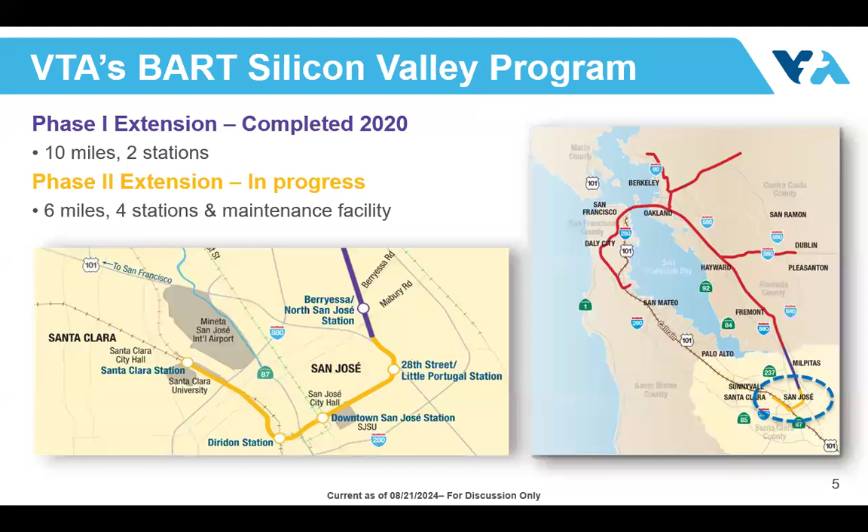I also have some really exciting news to share about where the program's going. We're here because we're trying to complete the ring of rail around the bay that started over 2.5 decades ago, when San Jose and Santa Clara County voters started taxing themselves to support the extension of BART in Silicon Valley. Many of us ride it every day, the extension we call phase 1 of BART Silicon Valley. Those first 10 miles were an important step, but not the final step.

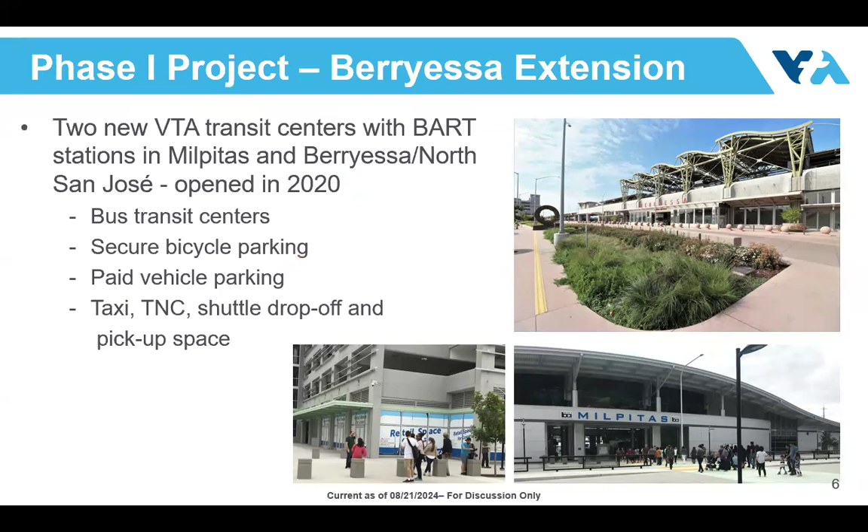Our job now is BART phase 2, which means bringing those tracks from Berryessa through Little Portugal, through downtown, all the way to Santa Clara. When it's complete, we'll have the station here in the Little Portugal community, plus two stations downtown, a modern rail yard in Santa Clara, and of course the Santa Clara station.

This project is one of the biggest public works projects ever undertaken in the South Bay. When it's done, there'll be a train every 7.5 minutes leaving Santa Clara, traveling across San Jose, up into the Bay Area, connecting all the major central business districts, Oakland, San Francisco, San Jose. It'll transform mobility in our community, and I know many of you have had that dream for years. It's our job to get it done.

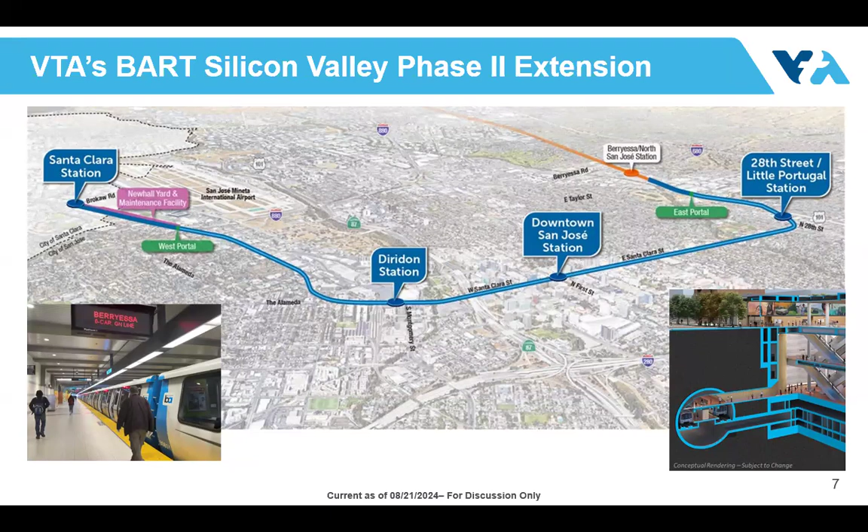Schedule-wise, for those who haven't seen it, we are planning to get BART Silicon Valley phase 2 open in early 2037. That wasn't a very popular message. We're in for over a decade of construction. We're in for the long haul here, and we're good for the long haul.

You'll hear some comments later from my colleague about how we're going to support the community, support small businesses to thrive through construction, so that the construction itself can be a win, in the same way the actual opening will be.

Let's talk about the most exciting news. We broke ground for this project, so we are under construction, building BART Silicon Valley phase 2 right now. On June 14th, community and political leaders - going back, Mayor Gonzales was there, Carl Guardino was there - generations of Silicon Valley leaders came and broke ground at a site in Santa Clara we call the West Portal. That's where we'll eventually sink a large tunnel boring machine into the ground and build a 5-mile-long tunnel from Santa Clara all the way to the East Portal, just past the 101, east of here. We're under construction.

We also found out six weeks later that we're getting the second largest award for any transit capital project in the country from the Federal Transit Administration - $5.1 billion coming to San Jose. That is actually very good.

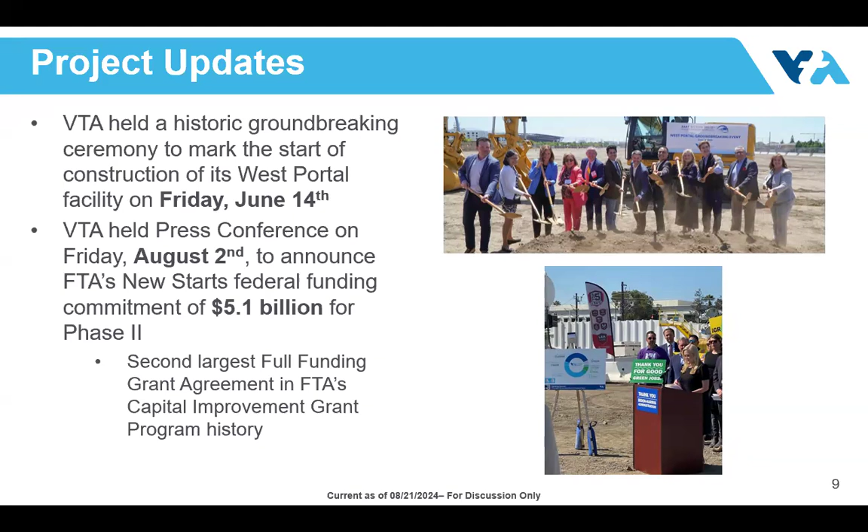At $5.1 billion, it's a lot of money. It's the second biggest ever, the most ever project outside of New York City. Unfortunately, it is not every dollar we need to finish the project. And that's the challenging position that we, the project team, find ourselves in right now.

We are working right now to fill that gap through additional funding sources, but also by finding some efficiencies and cost savings to deliver this project for less than the overall $12.75 billion.

So we find ourselves at a really exciting juncture now, under construction, almost fully funded by the federal government, lots of support, lots of wind at our back in terms of funding and support. But we still need to make some important decisions about the design.

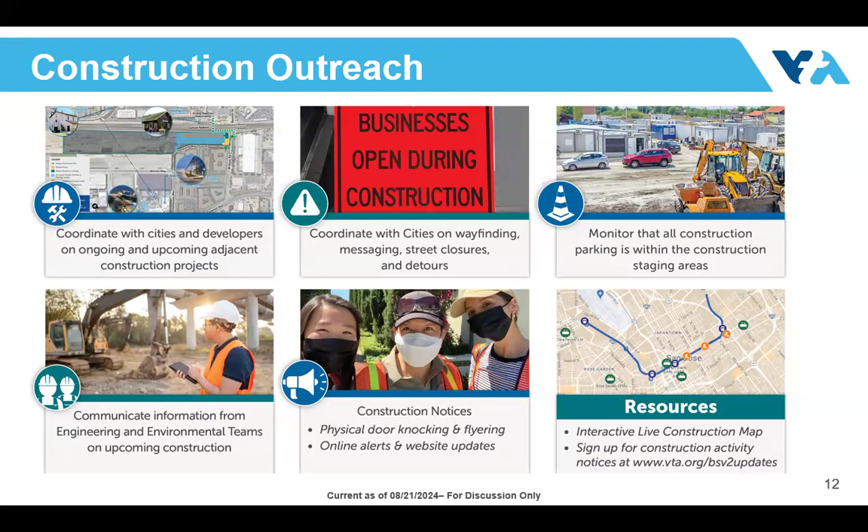As construction really begins, our team will be knocking on doors, doing flyering, engaging with businesses, and engaging with you all to keep you informed. So if you haven't given your email or your phone number, it's a good way to stay up to date on the project. I promise we won't spam you, but we generally send out good information on a quarterly basis.

Specifically for businesses and for those that maybe own businesses in the local community, we're going to be having a program called the Thriving Business Program. This is a program that specifically will be helping small businesses during construction.

For those that are affected or close to the construction, we'll have three things that we'll be doing to really help businesses. We'll have a marketing and signage program where we highlight businesses in the community, highlight you on VTA buses, at bus stops, on signage, city newsletters. The city is a strong partner on this program as well.

We'll also be providing direct resources to the community. So if your business needs marketing support or accounting support, or how to learn how to do something, we'll be offering additional resources to the community. And then third, there will also be a direct financial assistance program.

So those are for businesses in specific areas that will be affected by the most major elements of construction, like sidewalk closure or lane closure, or something that will be directly affecting your business. If you're interested in that, we have interest forms where you can talk to staff members.

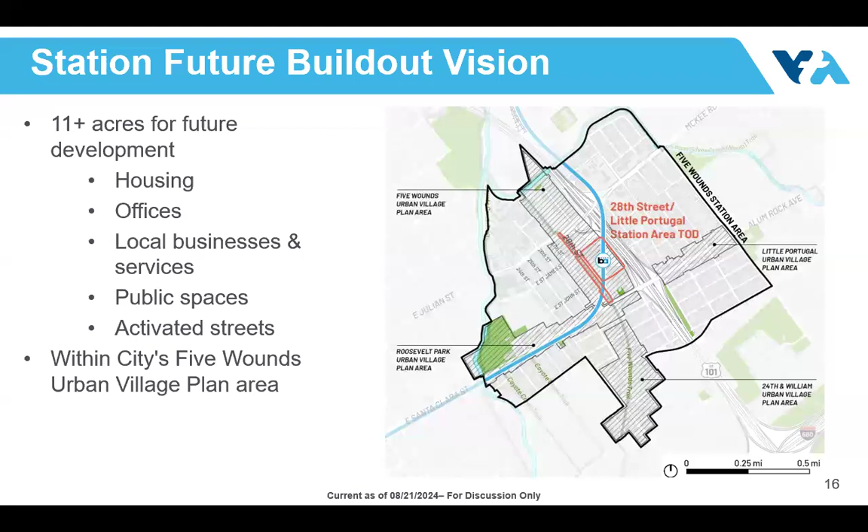Another important effort, zeroing into the station area, is the 11 acres of space directly around the blue station in the center. This is land some of which will be used for the station, but once we're done with construction, also has the potential for additional homes, jobs, community gathering spaces, and parks. Our other team at VTA, led by our transit-oriented communities team, Lissa and Christina here, and our consultant partners, has been engaging with you on what you really want this to look and feel like in the future, and how it will serve you as a community, whether you live here or work here.

Make sure you visit some of those boards here as well, so we have details, and you can ask staff questions about design, or give preferences or things you'd like to see in the future. They're going to be engaging with you a little more in the fall or winter, after we work through some of the details on the station, which is the purpose of why we're here tonight.

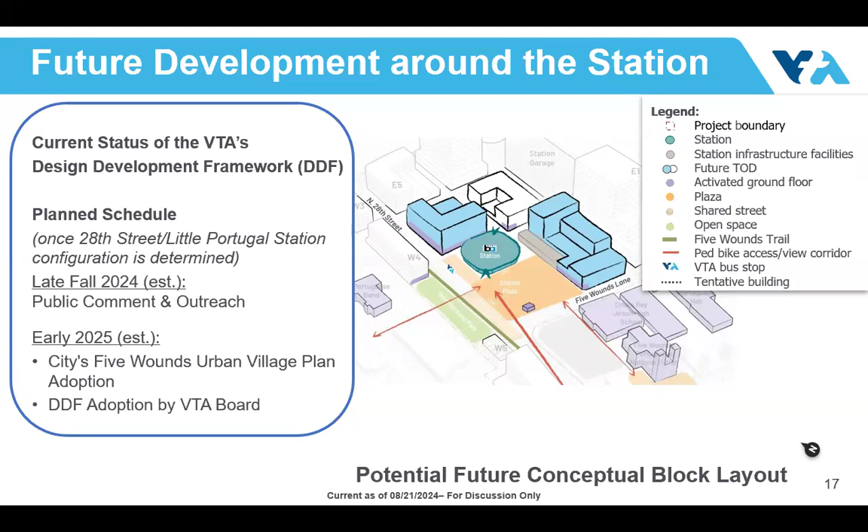Building on some engagement we've done today, we've talked to you a little about our community working group. This is a group of community leaders we engage with on a quarterly basis. We've talked to them twice specifically about some of the content we have here tonight, and they provide us that feedback. We made a commitment to come out to the broader community as well, you all here, and gather additional feedback tonight. So we're building on some of the feedback those leaders in your community have provided, and we're going to go over some of those details now.

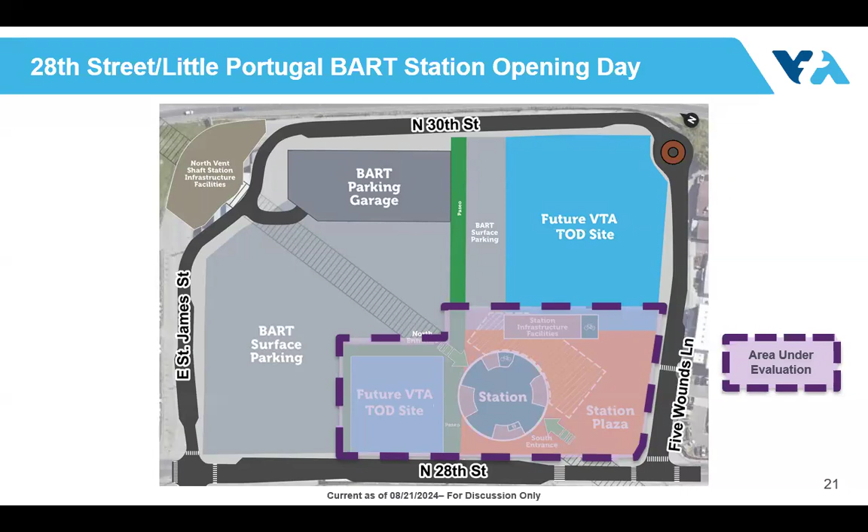We are about 60, 70 feet below grade with the tunnel, so we are pretty deep. I know there's talk about vibration, but when you're down that deep, the vibration is kind of minimized compared to when you're up towards the surface.

All of the facilities currently around this tunnel alignment will be monitored as we move forward. So these are the elements we want to talk about today. The first item is the north vent shaft, the farthest northern quadrant of our property. There's a lot of equipment, mechanical systems, and electrical systems that service the emergency ventilation system within the tunnel on that northern boundary of the parcel.

I realize I'm getting into some technical details, but I want you to know this facility, this 5-mile extension, has a lot of equipment that needs to come up out of that tunnel and surface at each station, to really have those two entrance and exit locations, called the portals, plus our 3 stations along the line. So a lot of equipment, connections, cables, and communication devices need to come up out of the tunnel and into the surface. This is where we get our power, things like that.

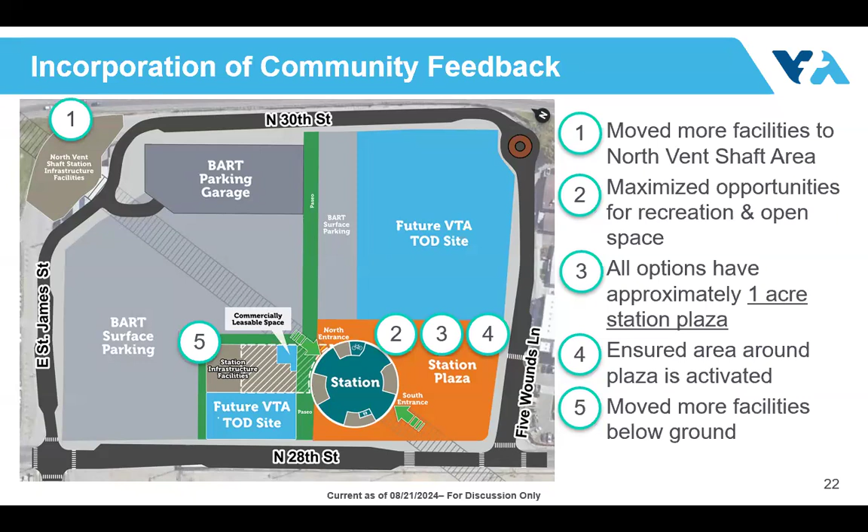Item number 2 is our station itself. That's where we want to maximize opportunity for recreation and open space in the plaza. We have about a 1-acre plaza area surrounding this station, so that's what we're really looking for. We've tried to activate as much as we can around that plaza, including commercially leasable spaces and the future TOD in the corner. So those are things that we've been working on.

These are the areas I talked about, which have to be above grade or below grade. There's a lot of detail here, we don't need to get into all of it, but some community members have asked what are these things around the station. This is what they are - we've got a lot of batteries and things we need to service that station itself.

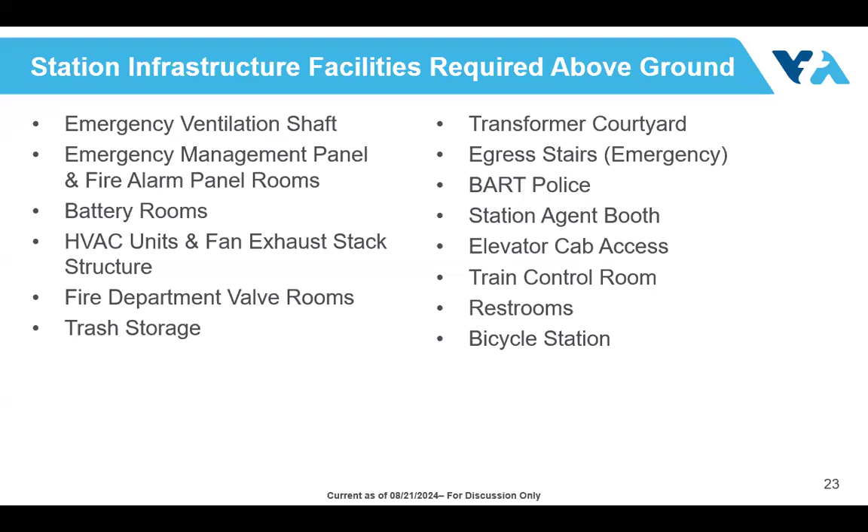The 4 station configurations we have to look at today are called underground, integrated above and underground, a consolidated building option, and an above ground facility. These refer to a lot of those equipment elements I talked about. We're going to tell you whether they're going to be below grade or above grade, and you can actually see them. The biggest thing we want to envision is integrating folks to get into the station, but also accommodating all of these exterior elements of work.

So this is one option. The area in white around that station is what we call the underground option. That is where we have most of the equipment underground, right below the surface, up to about 25 feet deep. And we'd have a lot of heavy equipment that would be there.

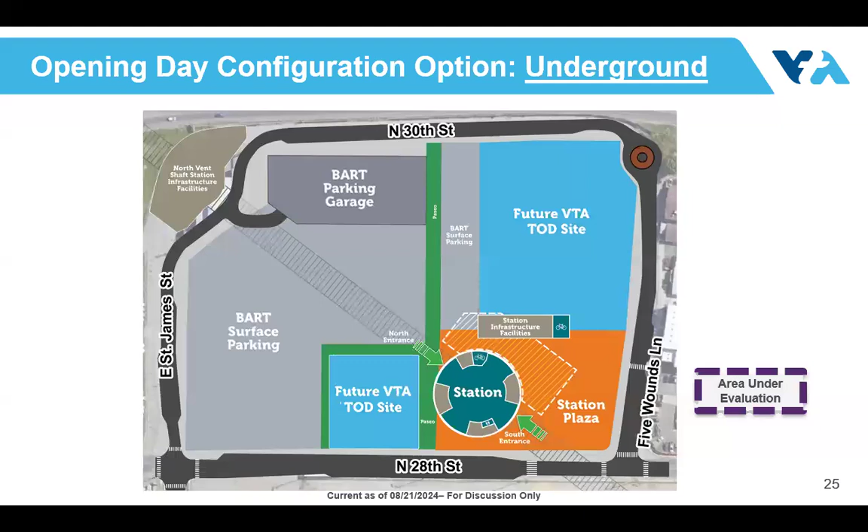We would also have some infrastructure facilities above grade, shown there in gray. So this is the area that's below grade, we have some areas above grade, and that opens this area up for a future TOD site. So this is the underground option. Again, we have some boards over here, and you guys can give us comments and feedback on these 4 options that we'll look at tonight.

This gives us a little more detail in terms of square footages and offsets.

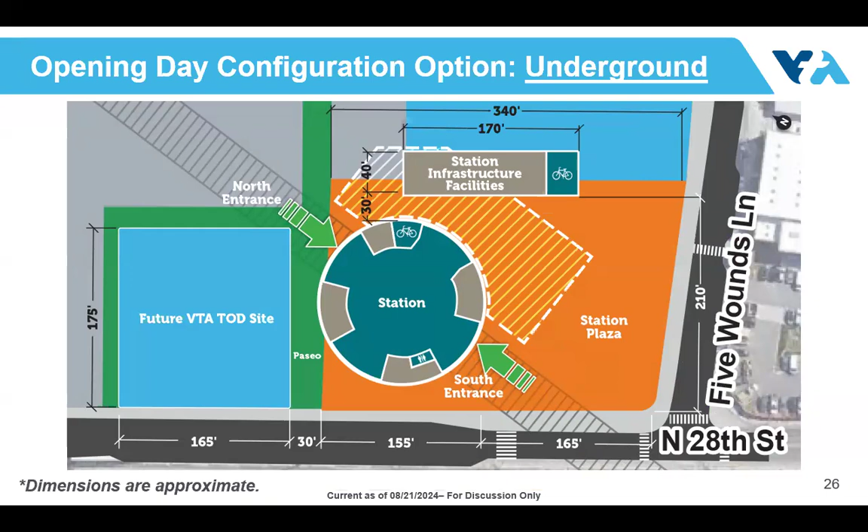This is the ultimate build out of that facility. So the majority of the facility for the station infrastructure is here. You cannot see the underground facility, it's right over in this area. And then we've got this above grade facility that we need here, and we've got all these future buildings.

Now, we don't really need to talk about all the future buildings surrounding the station tonight. Those are things that VTA will need to work with a developer on in the future. This $12.7 billion program builds the station, builds the tunnel, and builds some of those ancillary facilities. The other mixed use elements happen later when VTA gets the transit-oriented teams together and builds this thing out. We definitely can take comments, and that's what this booth is about over here. So please take a look at what's over there for the TOD.

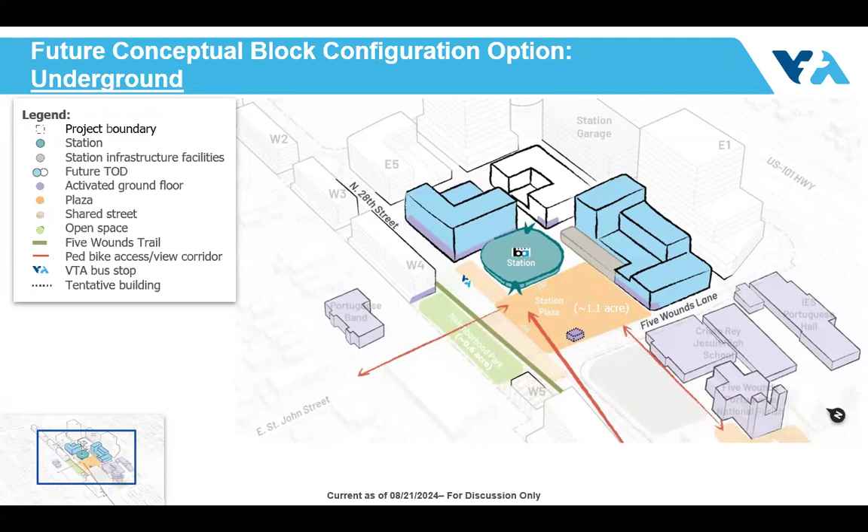Okay, this is the second option. I know it might be difficult to look at the differences, but before we had an option with underground facilities over in this area. This one has an underground facility here, extending from an underground shaft that goes all the way down to the tunnel, and then comes over here. We've got a lot of facilities that are above grade and below grade, so elements of work that are both underground and above ground.

We've also tried to keep some space in this corner that we call commercially leasable space. That might be retail, or areas where we can get people in to sell food, or other elements of interactive community engagement.

We also have a pretty wide area here for future TOD development. This could have ground floor activation as well as mixed use above — housing, office space, as well as a bunch of ground floor elements of work. So this is the option where we've got a connection to the tunnel through the station, and everything's kind of right next to it.

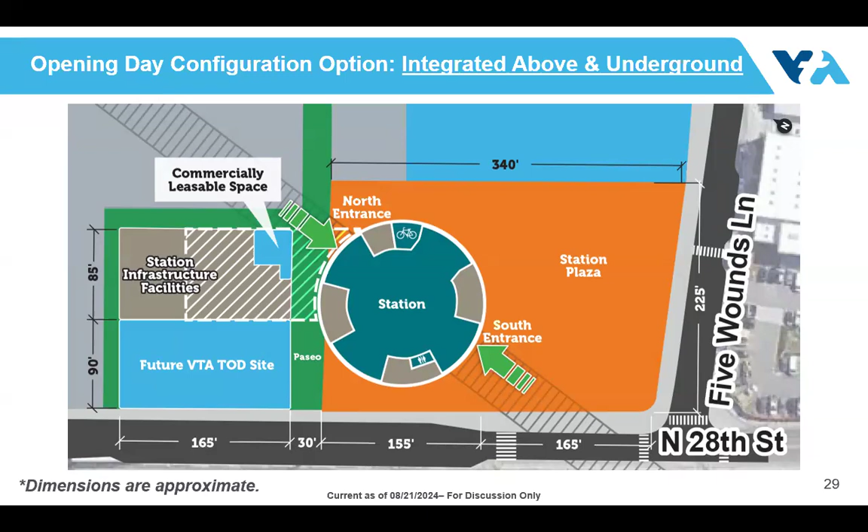And this is the build out of that scenario. As you can see, we've got our at-grade and above-grade facility here. We've got a little bit of mixed use element here, and a large facility we're able to build right adjacent to 28th Street. And then we've got our 1-acre plaza here.

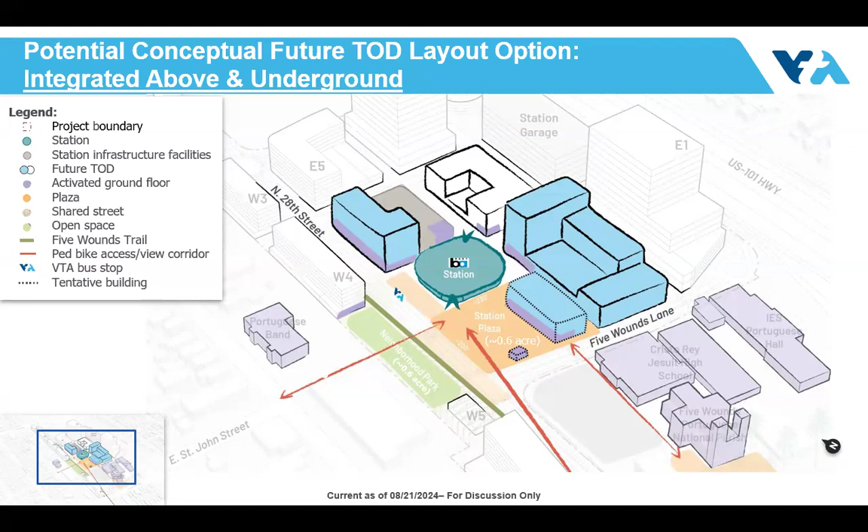Okay, this third option consolidates that above grade facility with the station itself. So instead of having two different buildings, we have one building that brings the station and all that equipment, mechanical, electrical, all of those things together in one building.

One thing this does is it doesn't quite complete a paseo all the way across. We do have a station that is fully integrated, and it brings a little bit more of this infrastructure into the station itself. So the other options provide a little bit more open station feel, while this one would keep the station a little bit more consolidated, a little bit more tight.

This also has a pretty significant number of facilities below grade, and that is shown there in the white patch.

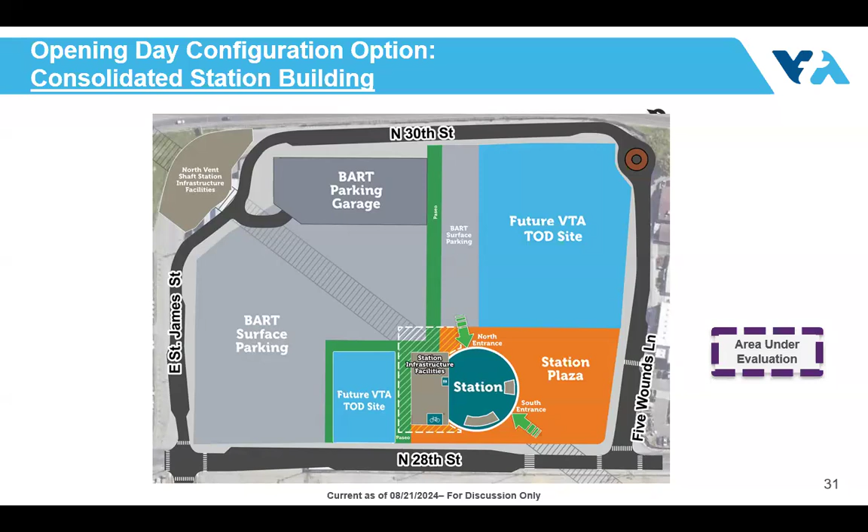And then our last stop — this is a close up of that view. We do have two entrances into the station. One entrance faces the corner of Five Wounds and 28th Street, and you'll see all the way to Santa Clara Street. That's one of our view corridors, making sure people know where to go from Santa Clara, so they can see right down 28th Street and right into the station.

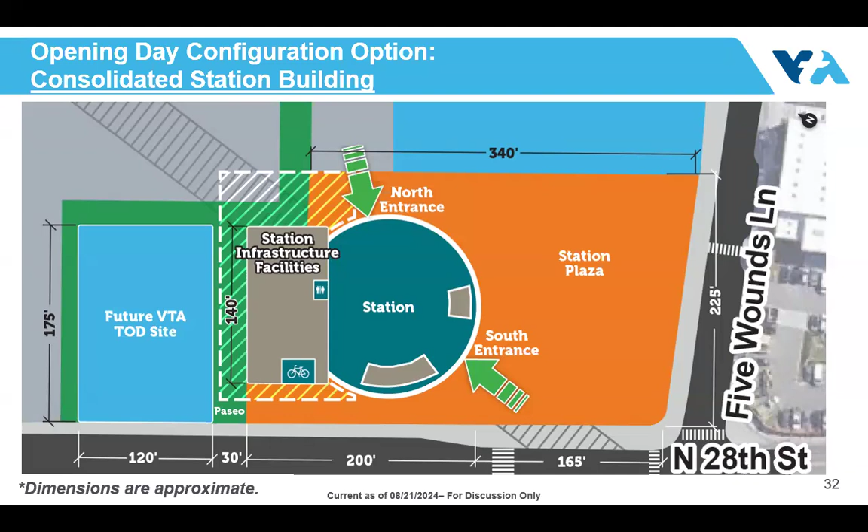And then a second entrance, which would be here, lining up directly with the future parking garage. This is the build out of that facility.

The last slide has an above grade scenario where our infrastructure building is almost all above ground here. We do have a little bit less space for transit oriented development facing 28th Street, but we essentially keep everything above grade. We also have a commercially leasable space between the station and this infrastructure building.

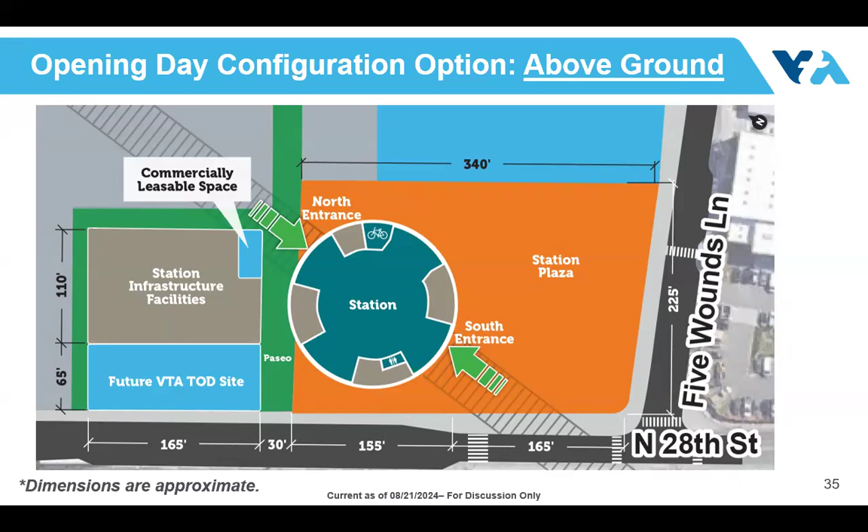These are the criteria we want to talk to you about tonight, as well as things we've evaluated. Program cost is a big one that Tom mentioned. We've got our user experience — how do people interact with the station, whether it's open, a little more open, or a little closed, things like that. External facing impacts and construction impacts.

The more we build underground, the more material we need to move off site, which means a little bit more construction impact to dig all that material up and out. And then the schedule — the more construction we have, the longer the schedule is, the more impacts to the area. All of these scenarios do not extend our opening day schedule, but they do impact our overall construction window in this area.

Now, this slide has a lot of those things I just spoke about: cost, schedule, user experience. It has our 4 station options listed up above. We've got the underground option, the integrated above and underground, our consolidated station, and the above-grade option. It gives you a little breakdown of the differences between the 4.

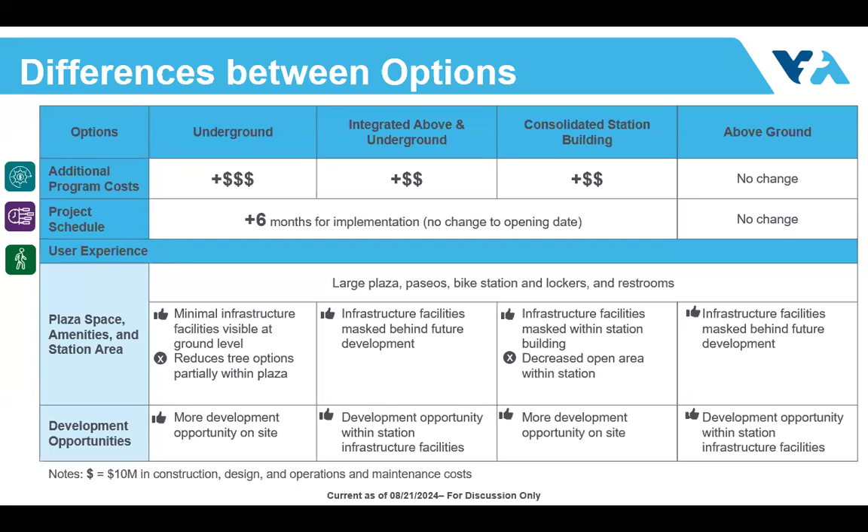So that's kind of what I was just saying. It's not really specific to the options, but I will say the difference is, in 2 of the options — can we pull the options back on screen — Lauren might know more of the guesstimated units, but the differences here are: in the underground option on the left, the future TOD is completely separate from any station facilities at all.

In the second option, the future TOD has an opportunity to be 90 feet deep on the 28th Street side. 60 feet is a good depth for having retail or commercial activated on a ground floor. So this 90 feet makes it so that you can have 60 on the left side, on the right side, or on the bottom coming from 28th, so there's more frontages that can have activated space.

And that kind of wraps the station facility building located right behind it, so you don't notice it's there. The BART team is also including that little corner of activated space near the other entrance of the station, which also wraps the building. But that TOD would be directly adjacent to the facilities structure of the station, with a little paseo or pathway in between the station and the future TOD.

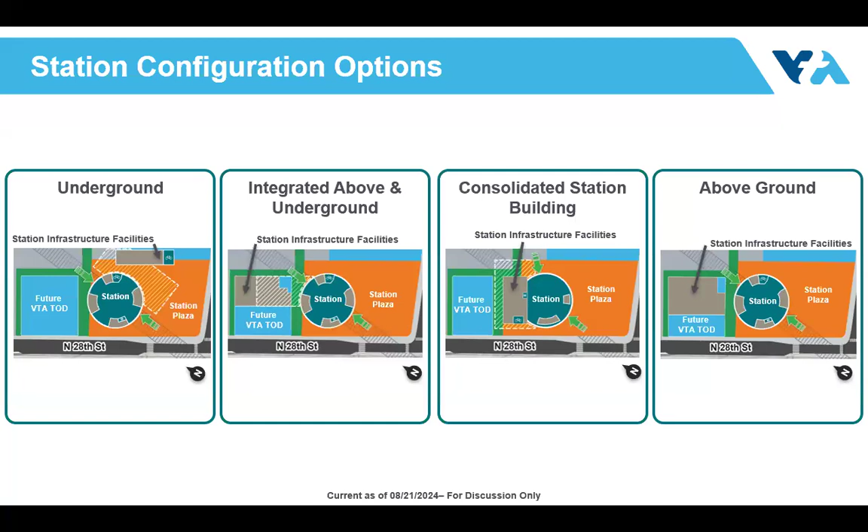Some of this was already discussed, but after today, we're going to review the feedback we received both online and in person. The selection of the recommended concept option will follow. Next, we'll share a path forward with the community and the BART Silicon Valley Phase 2 Extension Oversight Committee. The community will be able to share feedback on the future development of the station area in late fall of this year, and lastly, feedback on the look and feel of station elements late this year into early next year. That answers some of the questions we had on engagement.